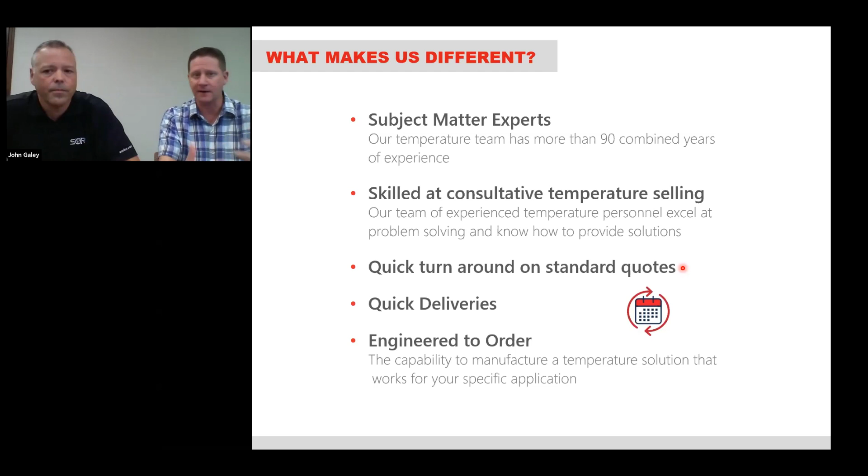So the first topic we really want to cover in terms of product is sample probes. So what is a sample probe? Some of you may be familiar with them, some may not have ever dealt with them. Really, they're used in applications where you need to take a representative sample from some process - whether it's a vessel, a pipeline, or a tank - but you need to pull a sample out without opening the process to the atmosphere.

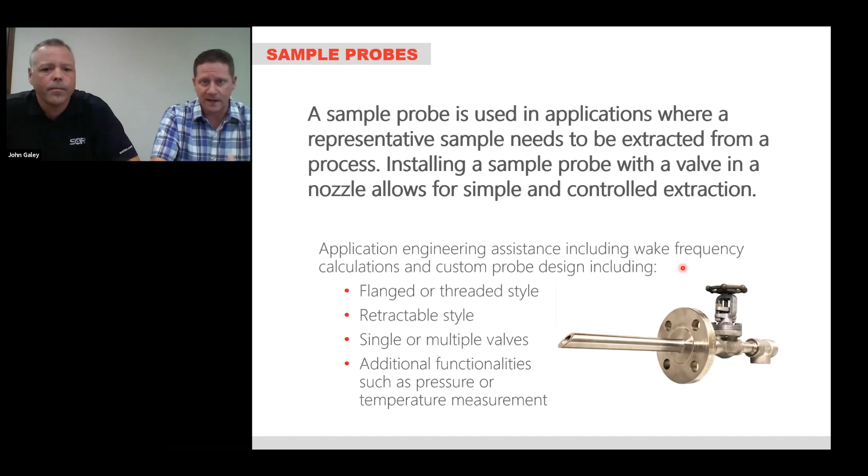Installing a sample probe, typically with a valve mounted on the back end, allows you to just open and close that valve to take a sample, or if you want to use it as an injection quill, to put a sample in. We can do flanged or threaded style - there are different ways to go about it depending on your process connection. We can do a retractable style sample probe, which you'll also hear referred to as hot tap. We can do single or multiple valves on the back end, depending on your process requirements, if you want to take samples in different directions. We can also add other functionalities into a sample probe assembly, such as pressure or temperature measurement.

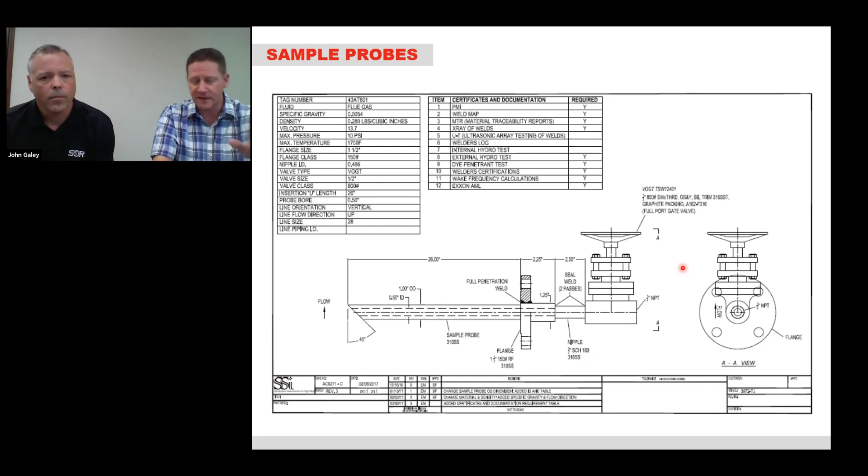Now, this drawing is really just a sort of standard type of sample probe. It's basically a flanged thermowell with the tip cut off at a 45-degree angle and a gate valve welded on the back end. You hook your sample line up to the back of that valve, and when you need a sample, you open it. When you're done, you close it. So this is a pretty standard example of a sample probe.

So the sample probe examples you see, these are some pictures that we've taken over the years. We'll kind of go around counterclockwise. Starting at the top, it shows you the view looking down the barrel of the gun, basically showing you the thermowell with the tip cut off, so you can see the open bore through.

Moving to your left, you see another typical style of sample probe, and it gives you a decent view of the valve welded on the end. You can also see the opening at the tip, a much larger opening than the first picture at the top. So we can do them in a variety of different IDs or openings.

The one at the bottom is a really neat one we worked on years ago, where again it's taking a sample. You can see the little hole at the bottom, but it also is taking a pressure reading as well as a temperature reading.

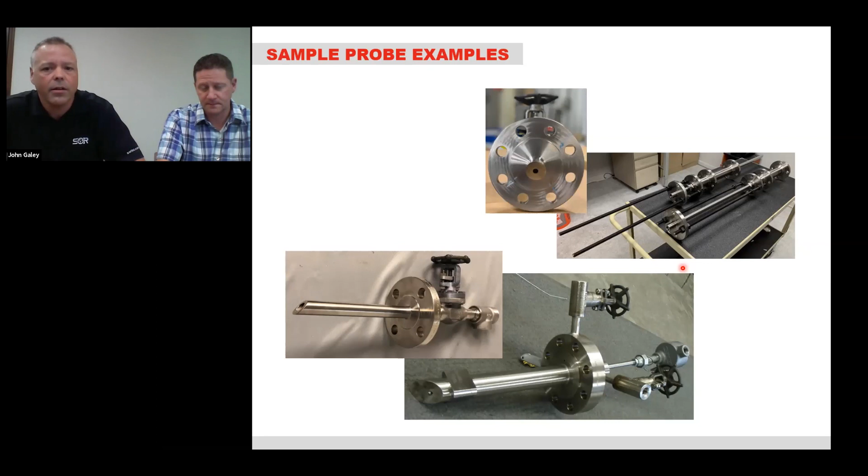And then moving up to the right, that is a picture of a retractable style sample probe that we recently did here at the facility. And that's the one we're going to talk about here as a case study.

The customer was Enterprise Products, and these were going on a flare line. They actually had some existing ones that needed to be replaced, so we went out to the job site. They had one that they had pulled out that needed replaced, and so I put it on the tailgate of my truck. We took pictures, we took dimensions, and I sent those off to Greg and his team, and they designed a new retractable sample probe to meet exactly the requirements of the application. We built them and installed them, and they're working great. So it was a really good win for us.

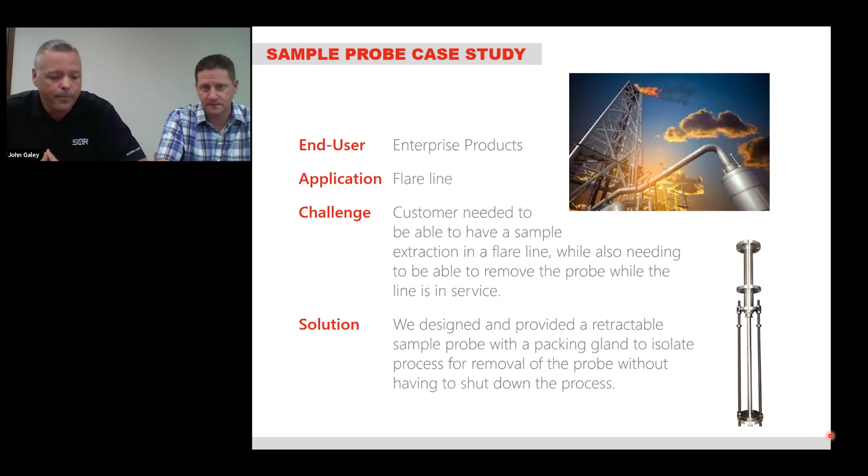Okay, so our next product category that we want to talk to you about today are multipoint sensors.

Now, multipoint sensor is a pretty broad category. They're usually used in applications where you need to get temperature profiling over distance at various points along that distance. They can come in a lot of different styles. One of the main ones, we kind of divide them into two groups. Typically, you'll see a pipe well style, which is what you see in this drawing here. And inside of that pipe well, we can either have guide tubes that use heat transfer blocks to allow the elements to be individually replaceable, or we can do positive contact bundles with springs that will keep the elements themselves pressed up against the ID of that pipe. Those are the larger style of multipoint.

Then we also do mini multipoints, which are typically small diameter tubing. We can go down all the way to 1/8 inch tubing with multiple points, really small points inside along length. And then there are nonlinear multipoints where you have an application, maybe you only have one nozzle that you can enter, but you need to route those points to various places inside of a vessel or tank. We can do those as well through a single entry point.

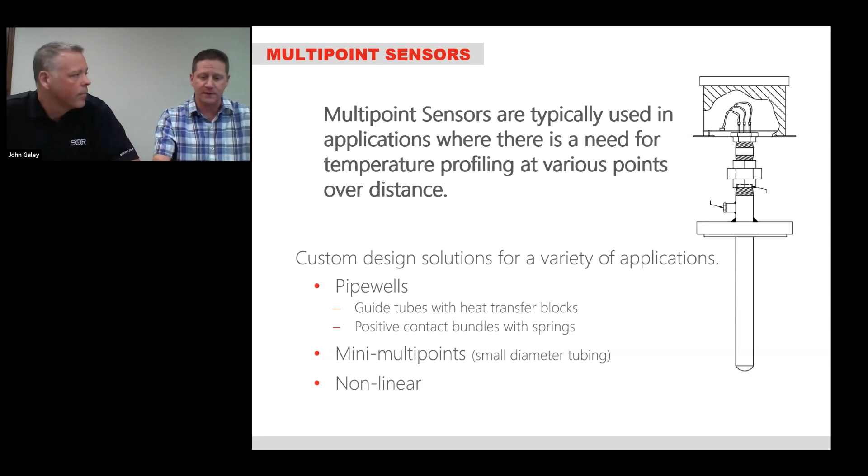And further on multipoint sensors, it's used for temperature profiling, like at different elevations inside a reactor if it's a top mount, or maybe across a reactor bed if it's a side mount. Most of the time for multi-points, we use thermocouples. There are cases where you can use RTDs, but in general, most of these are thermocouples.

And then secondary seals are available, and they're quite common if you're going into, again, like a reactor. It can also be monitored for pressure, so you know if there's been any compromise to the pipe well. You can either use a gauge or a pressure transmitter. And then we do offer a variety of testing. Dye pen and hydrostatic testing are available, among others. And then we can calibrate the sensors as well as have a positive point identification, which is like, say on a mini multi-point, just locating so that you know exactly where those temperature measurement points are along that tube.

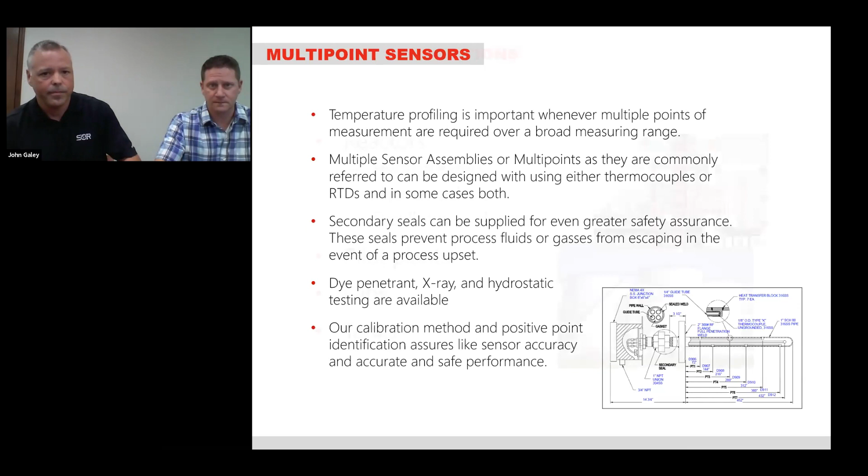So typical applications again for the larger pipe well multi-points are reactors, so hydrotreaters, hydrocrackers, distillation columns, as well as tanks. And then for the mini multi-points, typically pilot plants and labs are where those are frequently used.

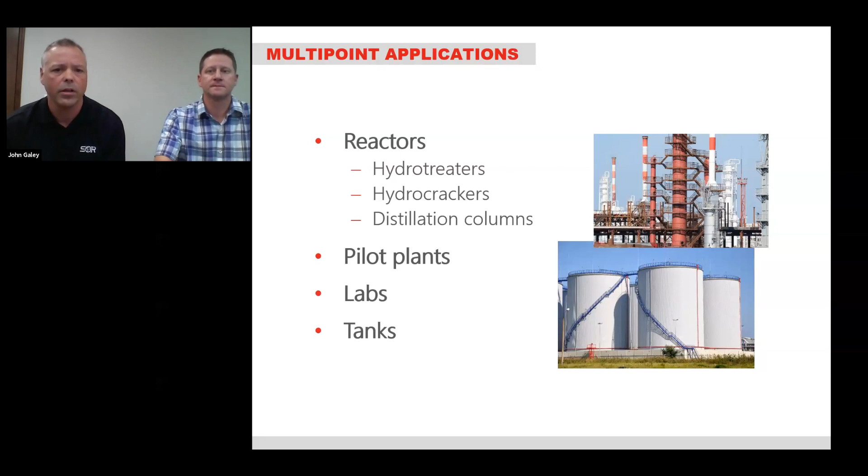So we'll move on to surface mount temperatures, and the first one we'll talk about is TUBESKIN thermocouples. TUBESKIN thermocouples are used to measure the tube wall of a furnace tube inside the furnace. That helps to determine the life of the tubes and also the temperature trending on those tubes.

It can also help you detect a coke buildup, as well as be used in control of the process, as well as prolonging the life of the tubes.

They can be customized in a variety of different ways. So we have expansion loops and different bends that we can do.

Most other bends are done in the field because what shows on paper isn't always what's out in the field, and sometimes it's hard to ship these things if they've got all kinds of crazy bends in them. So typically that bend around the tube is the main one we do, but we can do others. We have a couple different styles.

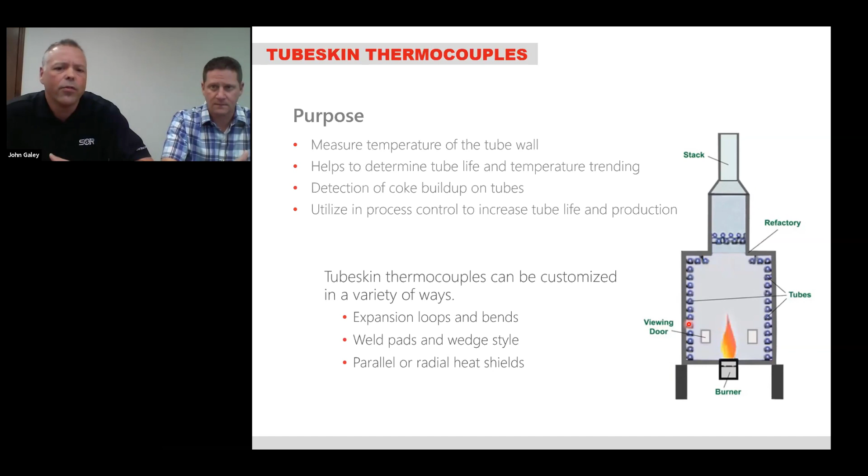Weld pad and wedge style are kind of the two most prevalent, and we can do a variety of different heat shields as well.

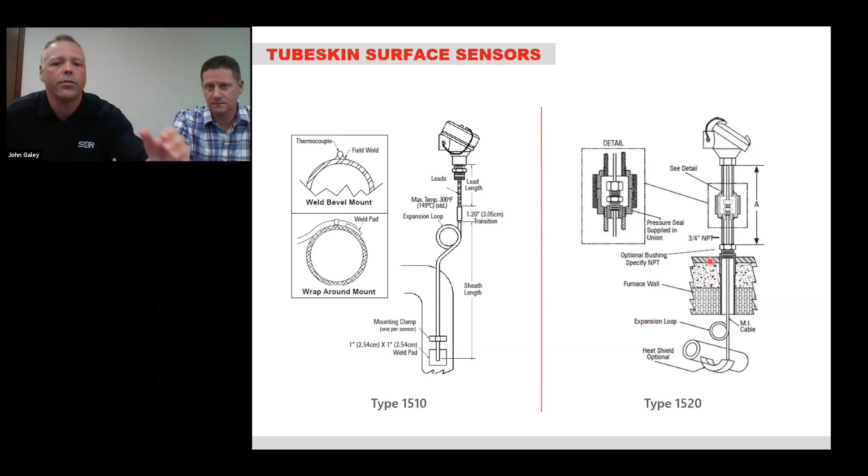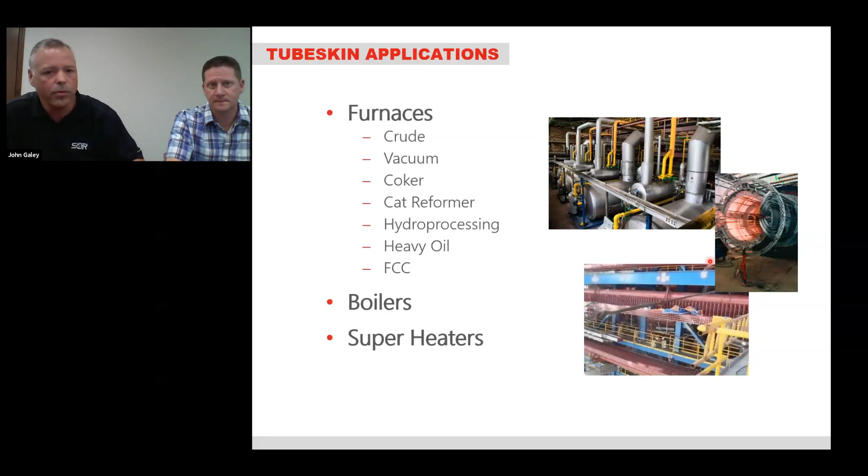We talked about surface mounts as a category, and you've got tube skins that John just went over, but there are other types of surface mounts we wanted to touch on that you may come across and have the opportunity to use.

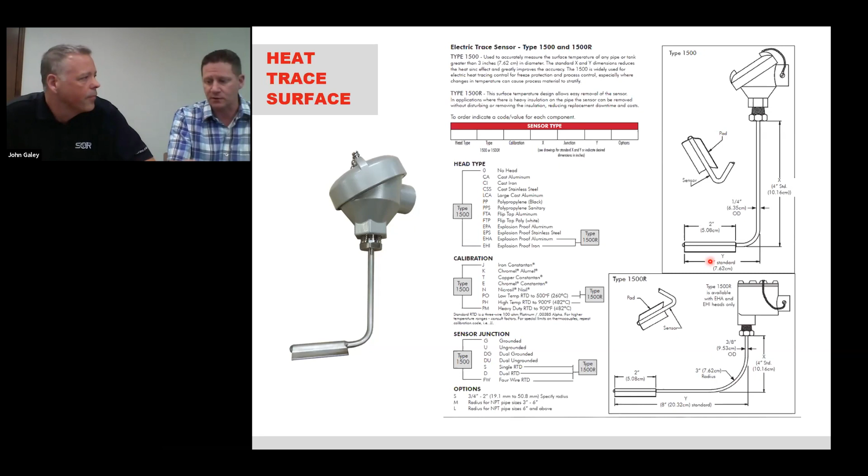Sometimes you get into a situation where you need to mount on a pipe or a vessel without being able to weld on it, because in order to keep it running, if you do any welding, you may have to rehydro test the whole system. Sometimes welding just isn't an option.

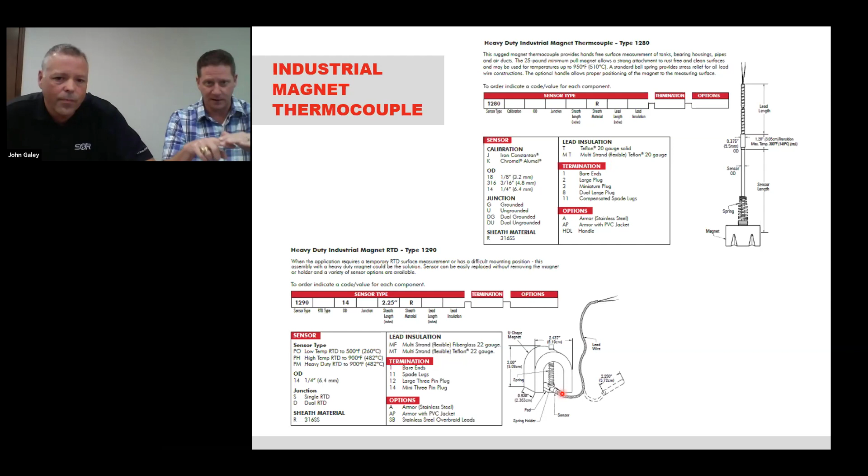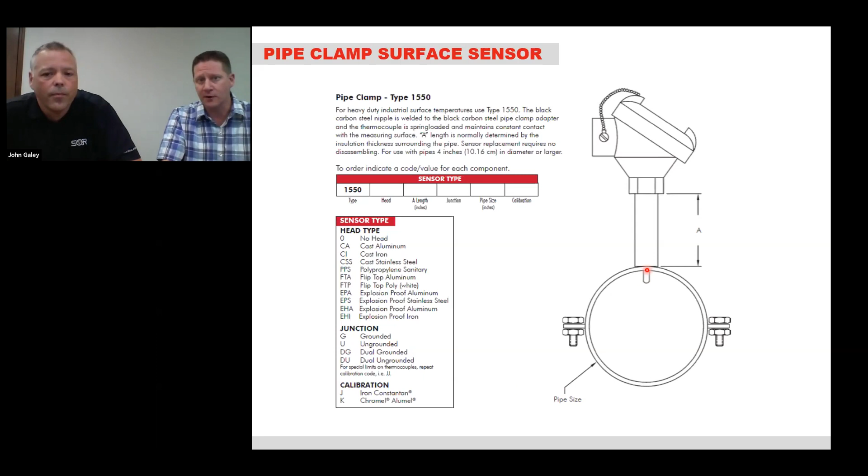Same concept, but instead of using a magnet, you can use a pipe clamp to hold that element tip against the surface. This would typically be spring loaded. Once you tighten this clamp down, that element will actually be pushed up in here, but because of the spring, you keep positive contact on your pipe surface. So that's another option for getting the surface temperature.

Okay, so that's it on the surface mounts.

The next category we want to talk about are high temperature assemblies. When we're talking about high temperature, we're generally talking about 2000 Fahrenheit as the threshold when you're really going to want to switch to a high temp assembly. The reason that's around where you start seeing the change is because a lot of the metals you'd typically use in a thermowell or a standard thermocouple or RTD sheath are starting to reach their limit, your Inconels and 310s. So you often at that point need to go to a ceramic like alumina or mullite.

Hexoloy is another type of ceramic that is really good for corrosion. It's got a little bit more strength than the alumina tubes do. There are recrystallized alumina tubes, which are good for pretty nasty environments. We've sold those in incinerators, for example, as a place where you might see recrystallized alumina.

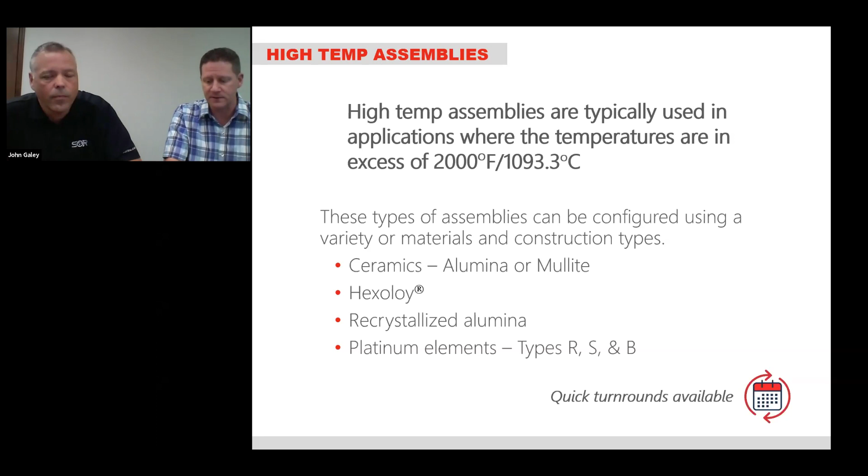And for elements, typically you're not going to get an RTD at 2000 Fahrenheit, they just don't go that high. So you're already going to be in a thermocouple range, but this is where you wind up getting into your platinum elements, your type R, your type S, and your type B. They're also very high accuracy, and they can handle those high temperatures. So typical high temp applications, again, include incinerators, thermal oxidizers, sulfur recovery units. They're very prevalent in those units, and also in certain parts of furnaces and boilers as well.

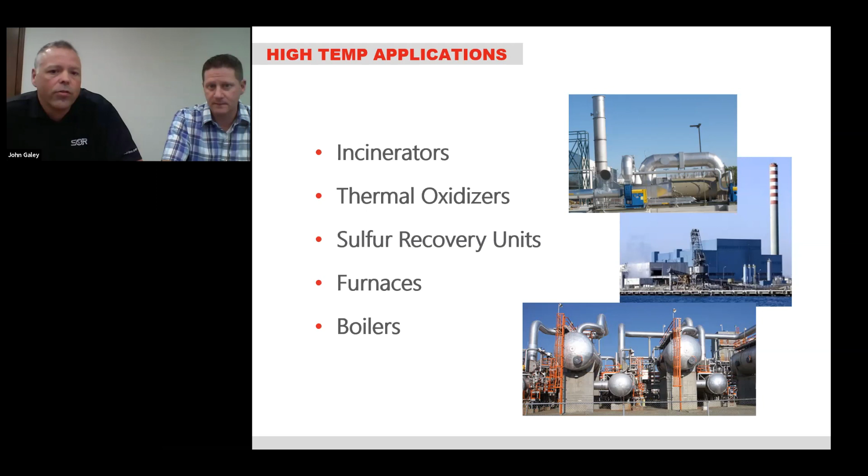Okay, and then custom and specialty assemblies. This is a whole lot more broad of a category than all the others, in that it's not specific to any particular product. What we want you guys to understand is that we have the capability to help design and build a custom solution for temperature in all kinds of different applications.

There are a lot of unique applications that pop up here and there where we need to get a temperature reading, but we're really not sure how we're going to go about it. That's something we have quite a bit of experience with, especially with our inside sales group, to be able to help you with that process.

So what's in the catalog is one thing. What we're talking about here are the non-catalog type items. Just because you don't see it in the catalog certainly does not mean we're limited to what's in there. We can help you with a custom design, whether it's an improvement on an existing design or a new design altogether. We can help you with that process, and that's all very application specific. So the more information you have about what you're trying to accomplish, the better we'll be able to help you figure out how to go about it.

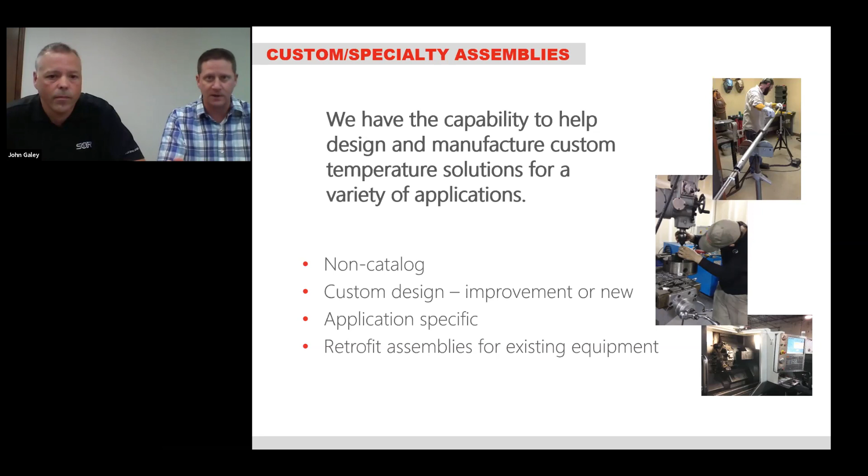We can also retrofit assemblies on existing equipment. There are a lot of larger pieces of equipment that may have come from Europe or overseas somewhere, and now you need to replace the temperature elements, and they may have quirky fittings with oddball threads or something that's non-standard for our day-to-day stuff. We can do all that as well. So really, to sum that piece up, if it's not in the catalog, that's okay. We can try and help you come up with a solution to whatever that application is.

Our competitors just basically said, this is what you need. Where again, we worked with the customer, we went back and forth with them, and we came up with a solution together. So we competed our solution against the 2 other manufacturers, and not only did ours last longer, but the customer was most pleased with us because we didn't tell them what they needed. We listened to their thoughts and incorporated their ideas into the design, and it ended up being the best. So we won that business, and we have that customer as a longtime customer now.